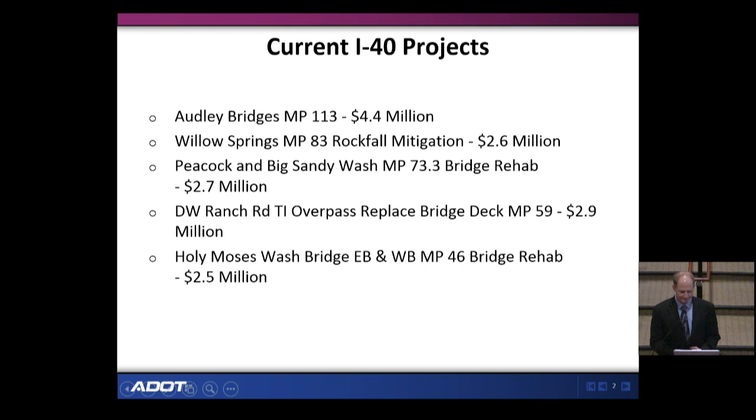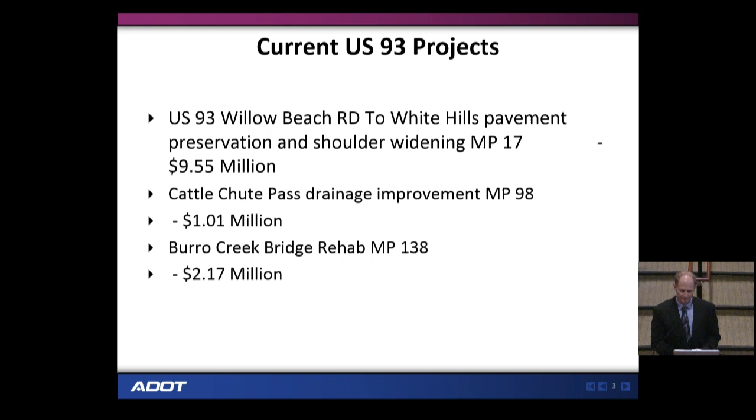Right now on I-40, we have several projects going on between Seligman and Kingman. Most of them are bridge projects. We do have one rockfall project within the Willow Springs area, and later this fall we will have a pavement preservation project going on in that same area. And then on 93, we are just finishing up a pavement preservation and shoulder widening project up north from milepost 17 to 28. South of I-40, we have a drainage project as well as another bridge rehab project just getting started.

One of our focus areas is on 95 in the Bullhead City area to look at improving safety. Part of it is looking at access management, and another part is trying to identify a parallel corridor to relieve some of the traffic volumes off of 95. We've been working on ideas for the past few months, and we will be presenting these concepts and proposed solutions to the public this fall. We will also be pursuing HSIP funding for certain areas.

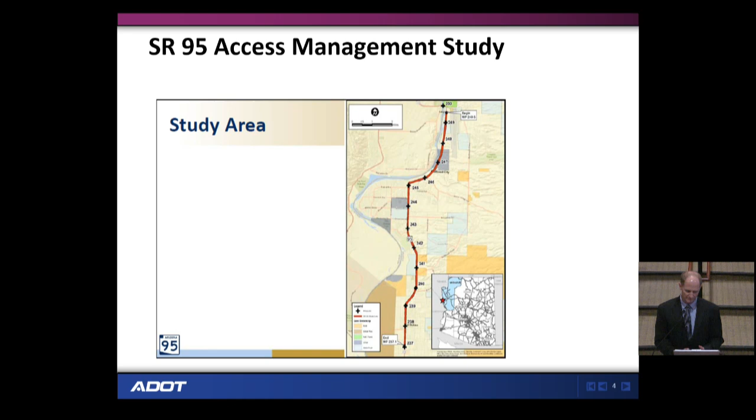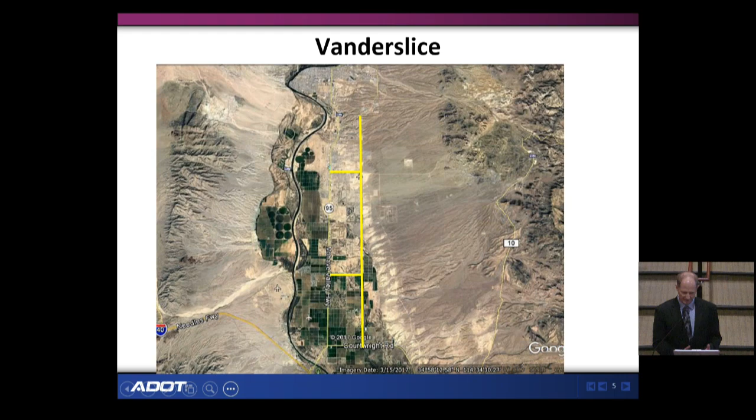About 10 years ago, Mohave County conducted a design concept report to look at a parallel corridor known as the Vanderslice study, or corridor. So what we're looking at now is another study to see how we can phase that in smaller, more affordable segments. The estimate was a little over 40 million, so knowing that funding is tight, we're looking at how we can break that up over time.

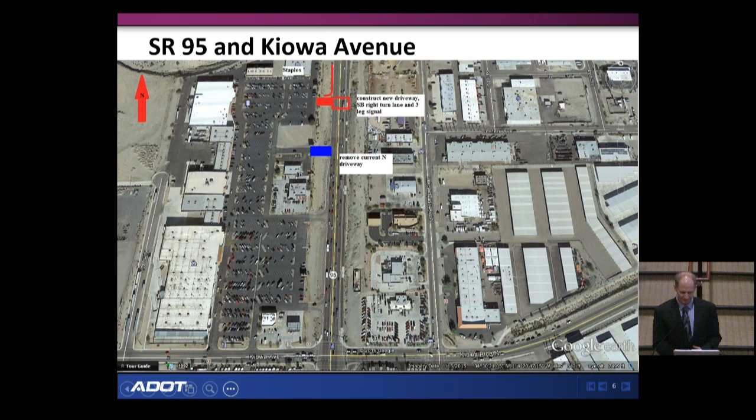Another safety project down in Lake Havasu will construct a center raised median from Kiowa Avenue past the strip mall area. This project is moving along and is scheduled for this fiscal year. We are adding a signal at the far end to help with the left turn volumes.

As for the West Kingman interchange, we are looking forward to that going forward. As we talked about last night, there are several times when traffic backs all the way up to the 68 interchange. Right now, in fiscal year 18, we have $5 million for design, and then in 2020 we have $10 million set aside for right-of-way, and in the development program we have $55 million for construction. This is just phase one, the Phoenix to Vegas segment. The Vegas to California segment would be at a future date.

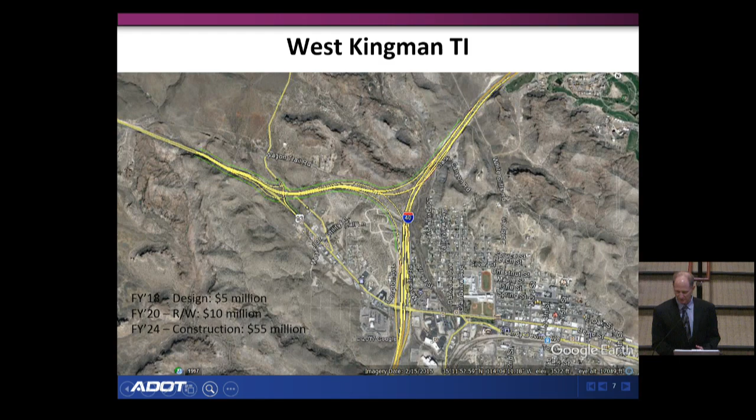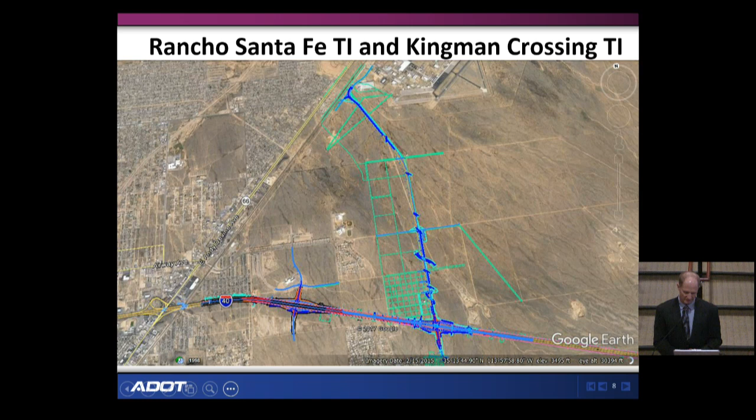Two other interchanges of interest are the Rancho Santa Fe TI and the Kingman Crossing TI. The one on the right is Rancho Santa Fe, which connects to the airport area. This will support industrial development in that area, as well as remove truck traffic from Andy Devine. To the left is the Kingman Crossing interchange, which will provide access to the hospital as well as property in that area suitable for commercial retail. We've recently been meeting with the city and stakeholders to discuss partnerships and possible funding strategies. That's something we'll continue to do and see what we can work out. So with that, that's all I have—if you have any questions.

Alvin, I was wondering if you could clarify for me. I was of the understanding that where the Kingman Crossing TI is at, maybe the city had also put some drainage in or something. That wasn't addressed yesterday, so I was just wondering if you could elaborate on that.

I'm sorry, the drainage? Was there some type of infrastructure that the city of Kingman had done some time back? Oh yeah, there was one easement we were talking about. Maybe some of that easement could go back to the city. Thank you, so that would be another discussion.

Does anyone have anything additional? Thank you, all right, thank you.

Now we'll move on to the director's report. Good morning, Madam Chair, members of the board. The director sends his regrets, he had a conflict today and could not be here. He had no final issues to report. If there are issues you want the director to address at a future meeting, please let me know and we'll make sure to get him on the agenda and prepared to present. Thank you.

Madam Chair, that's fine, I'll go ahead and go through. The first item I had on the list was aviation. We are proceeding now with dispersing funds for the federal, state, local program. The 2 projects currently being approved through the PPAC are part of that grant program. Those are not projects that have been delayed, those are projects that are coming through. The federal grants were granted, and we're providing the match for those projects.

Madam Chair, Board Member Stratton: I believe when it was recommended to postpone the 20-plus projects, one of the questions I had at that time was whether the people on that list we had postponed would have any preferential treatment or come back on the list when we had the funds. That was going to be discussed with finance and the aviation department, and I don't believe we ever truly sorted that out. I'm wondering if those people we delayed can now start applying again, or where are we at?

Board Member Stratton, Chairman: what we currently have is 3 grant programs. What's being funded currently is the federal, state, local program. The state local program and the airport pavement management program are not being funded, but they'll be coming back online in 2019 and 2020 respectively. At that point, any projects that have been delayed will come through. We are in fact requesting all of our airport entities to go ahead and apply for grants so that we can track those and have a list put together, so we can make sure projects are hitting as quickly as possible once we get funding, and so that if projects have gone from minor to major because funding wasn't there, we know that's happening and can assist with that funding.

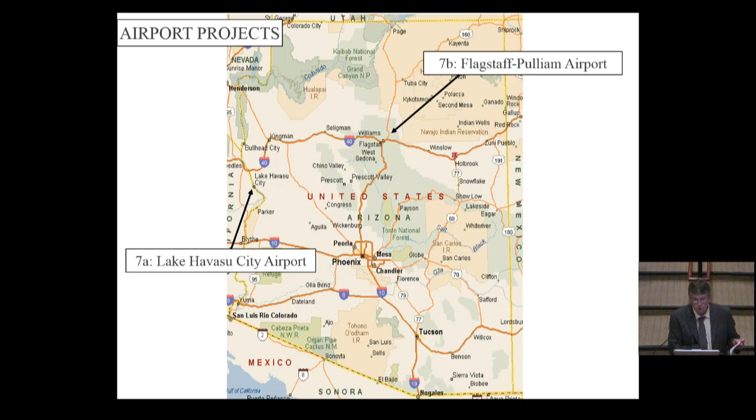Do we have a motion to accept and approve the airport projects, items 7A and 7B as presented? Second. Motion by Board Member Sellers, seconded by Board Member Cuthbertson. If there's no additional discussion, all those in favor? Aye. Aye. All those opposed? Motion carries. Thank you. Thank you.

We'll now move on to item 8, which is the project modifications to the FY 2018-2022 5-Year Transportation Facilities Construction Program. Dallas Hammit, please.

Morning, Madam Chair. I was asked to prepare an update on 2 projects that had discussion last month in Payson. The first one is on State Route 69.

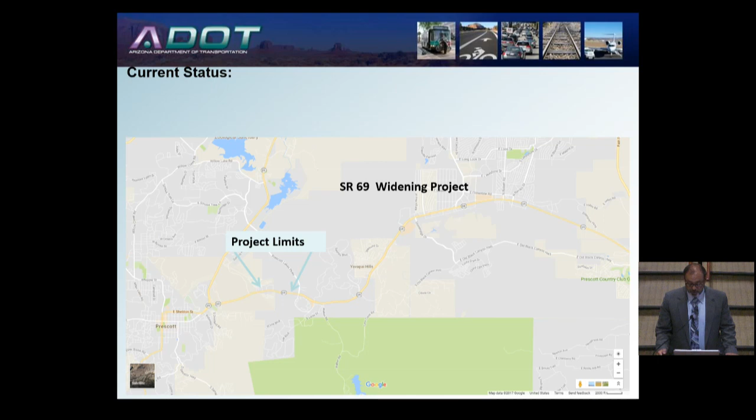This is in the city of Prescott. You can see the limits of the project on the screen, and I'm going to zoom in a little bit and show you. If you know the area, there's a Walmart as you're approaching from Prescott Valley into Prescott, and the car dealer, and then you go down a hill, past Lowe's, and into the Frontier Village.

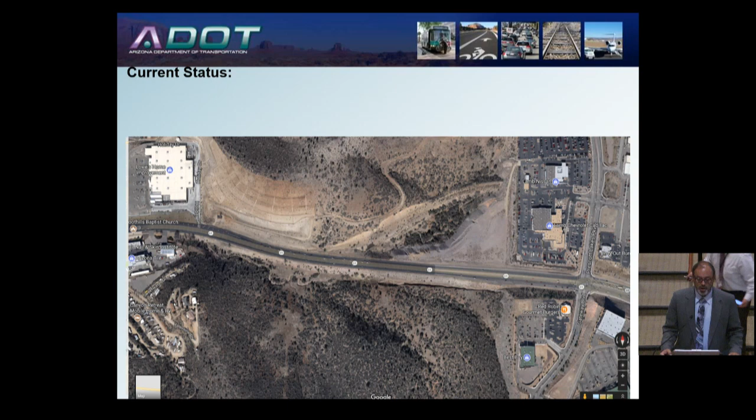That area, we go from 3 lanes to 2 lanes back to 3 and sometimes more. It's a bottleneck. The locals have identified this as a concern and have come, not just identified it, come with money and said, hey, we'd like to work with the department to improve this.

So where are we at to date? A scoping document was completed a couple of years ago. As the project developed over time, there will be some modifications to that scoping document, but they're fairly minor. The major elements of the scoping document will remain.

As of last week, July 12th, we did complete a joint project agreement, a JPA that all areas signed, and it has multiple signatures with the MPO, the county, the county flood control, and the city of Prescott have all signed on to that agreement. It was executed July 12th.

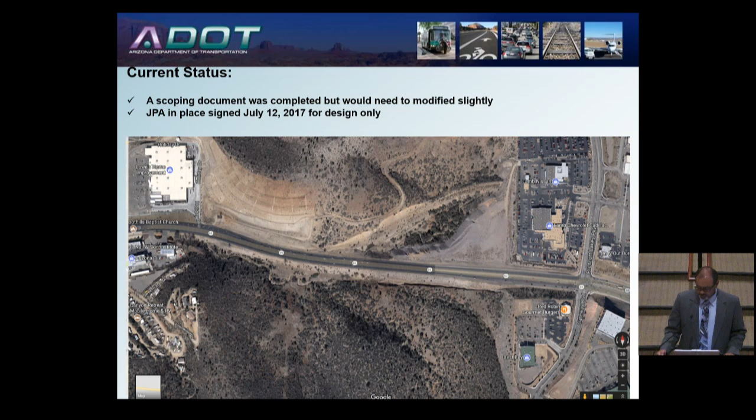With that, we have the opportunity to bring on a designer. We will go through ADOT's on-call, bring that in, and we should be able to have a designer on board by late October. By the time we're in our next programming cycle, we will be at a point where we can give a good cost estimate, exactly what this project will cost, and then we need to program.

Right now, we have a rough estimate from the scoping, but with those modifications, we're between 2 different folks that briefed me, a couple million dollars different. So once we get going in design, we'll get to a 30% design and have good numbers that we could actually program very well.

Before I go to the Flagstaff project, any questions on the 69 project? Madam Chair, Board Member Stratton.

You say you're a couple million dollars apart. What's the maximum it's looking like? $10 million. And the locals are bringing how much?

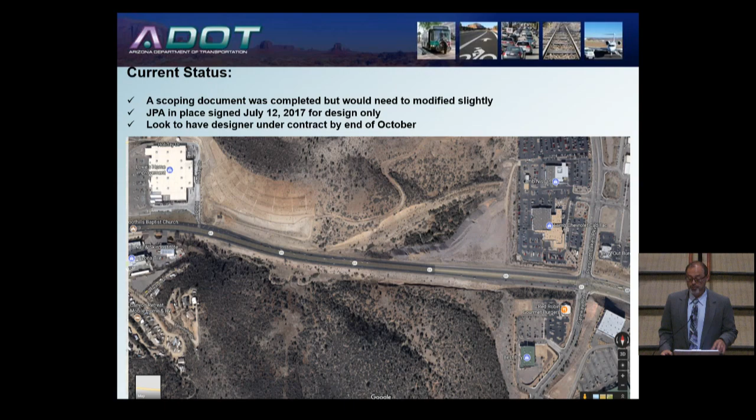Right now, the only thing that the locals have brought in, they brought the full amount for the design. They're looking at future years. My understanding, about $1.2 million over 2 years, Chris knows theirs better than I do. But we do not have an agreement started on the construction yet, only on the development and design.

We currently have $650,000 programmed in fiscal year '20, and then we also have flexibility in fiscal years '21 on that we can still move things around. If we needed additional funds, we could bring that back to our board and add another $650,000, so potentially another 1.3. So that would be a little over $2 million you guys would bring at that point? All right, $1 million for the design and potentially 1.3 for construction.

And did your $10 million, Dallas, include design, or was that construction only? I believe that was a complete project total, so it would be design and construction. Again, with the change in the scoping, there's not a detailed estimate, so a lot of it is gut feel from experts, but we haven't fully scoped the project that it will be designed, so we don't have exact numbers at this time.

So going through this detail, obviously it's something that I'm assuming the state engineer's office agrees needs to be done, since you're doing the scoping and looking into the project in detail. This is a need that we can support. At the same time, there's lots of needs, and within the system, if we brought it into this program or any other, we're going to bump out another project that we felt had a need as well. So we haven't prioritized it above some of the others.

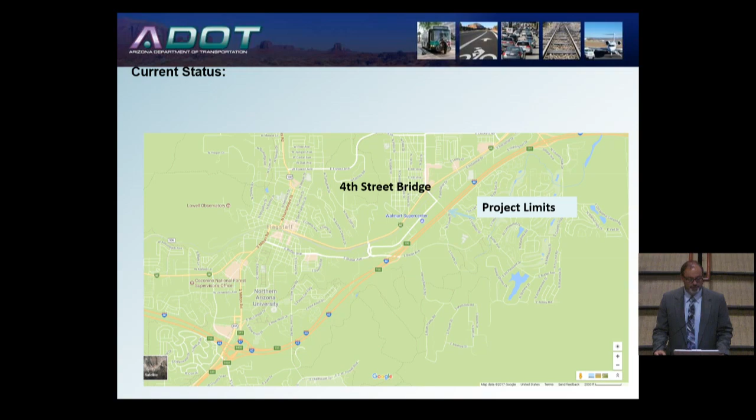The 4th Street Bridge is a bridge over Interstate 40 in Flagstaff. You can see the big map, and then I'm going to zoom in on it. There's actually 2 bridges over Interstate 40. ADOT was in the process of doing a preservation project on those bridges. The city of Flagstaff approached the department and said, while you're doing this work, it would make sense to widen these bridges to add future capacity on 4th Street. As you can see from the aerial, to the north there is a widening of the existing roadway.

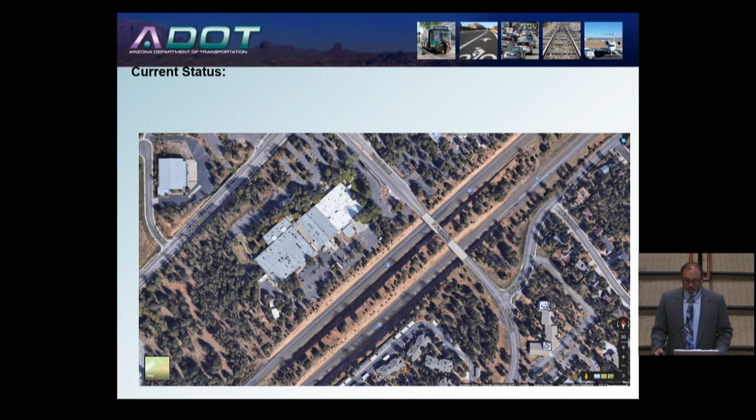ADOT had a scoping document completed. They are reconsidering that scoping because the original document was just to preserve the existing bridges. What do we need to do if we want to expand? One option is to rehab the existing structure and widen it. The other is to reconstruct the whole thing. One advantage of reconstructing is we can account for future widening of I-40. Someday we're going to need, Audra would tell me it's today, but someday we're going to need 3 lanes in each direction on I-40, and if we're putting money into a bridge structure, it makes sense that the new structure can span 3 lanes.

So we're in that process. At the same time, Audra and the district staff are working with the city of Flagstaff, getting agreements on cost. Right now, a rough estimate is around $9 million, with ADOT looking at $4 million and the city $5 million. They have draft ideas for a JPA that have not been executed, but they are moving forward. Once that happens, we'll finish the scoping to know whether it's going to be a new set of bridges or we can work with preservation. That decision should be made within the next month, what type of structures we're going to do. So that project is moving forward through the JPA negotiations, and the scoping will be completed early next year.

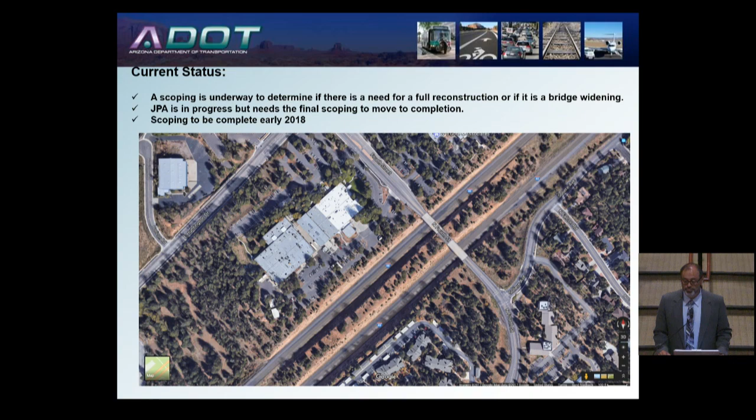Board Member Stratton asks: Dallas, didn't we have $2 million budgeted for repairs? That was in the preservation plan, which would be part of our $4 million if we bring that forward. What year was that for? I believe it was 2020.

I'd ask that this come back to the board at the same time as the simple project comes back, since things will be further along, the JPA may be signed, and the scoping or recommendation on replacement would be done. It's actually the same situation, an entity is coming forward with a lot of money and it would cost ADOT very little in addition. We'd like to discuss it then. No motion is needed, but we'd like both items brought back for the November meeting, and they'll be on the agenda.

If there's nothing further on item 8? Not on item 8, Madam Chair. Board Member Sellers asked whether this would delay the project in any way by delaying the decision until November. Madam Chair, it would not.

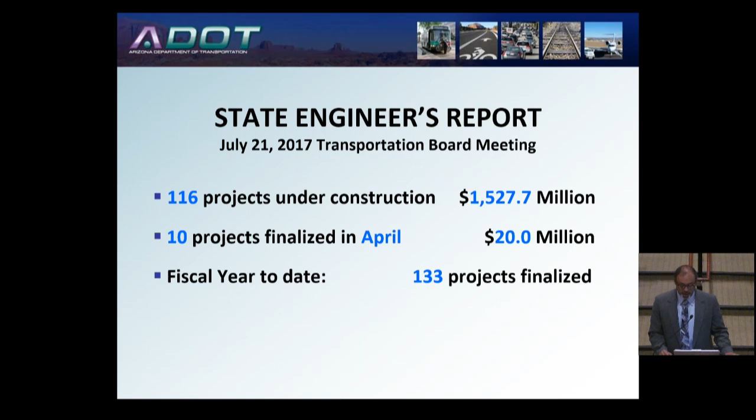If there's no additional questions, we'll move on to item 9, the state engineer's report. As far as the state engineer's report, currently we have 116 projects under construction, totaling $1.527 billion. 10 projects were finalized in April, totaling $20 million, and year to date we have finalized 133 projects.

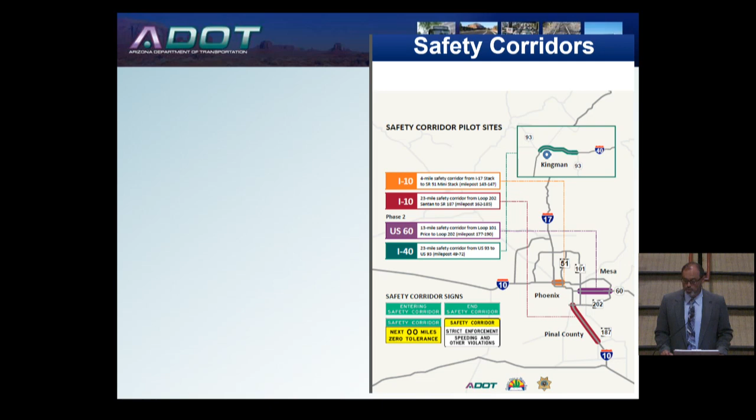I was also asked to brief the board on our safety corridors. Right now we have 4 safety corridors throughout the state. Some may ask how we picked these 4, and why only 4. We work closely with DPS, the Department of Public Safety, and the Governor's Office of Highway Safety to identify corridors with a large number of crashes and citations. DPS brought that information in, and the big thing is behavior, we believe behavior is causing a number of the crashes on these corridors.

The corridors include I-40 between the 93s, here in Kingman, as you go north on 93, then take I-40 and go south to Wickenburg, that segment of I-40 is one of our safety corridors. The segment of I-10 as you approach the tunnel is a safety corridor. The segment of I-10 as you leave the 202 in Chandler and go through the Gila River is another safety corridor, and our last safety corridor is also in the metro area on US 60.

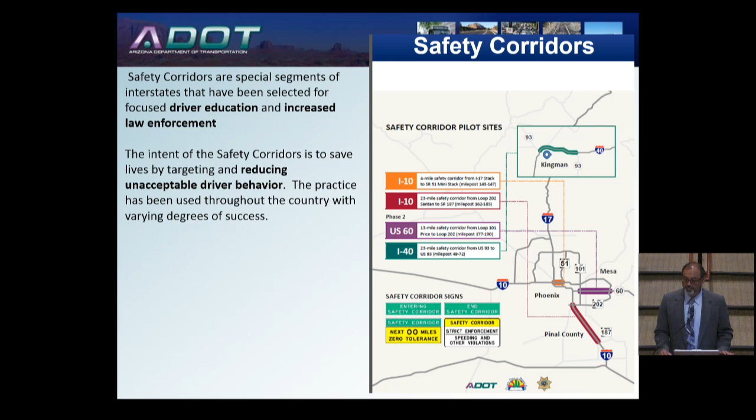In these areas, DPS is committed to extra law enforcement. That's one reason we can't expand to more areas, since it expends multiple resources. We participated by getting some signs, and the Governor's Office of Highway Safety brought money to the table for this effort. We're working to educate drivers and increase enforcement. Our key goal is to save lives by reducing unacceptable behavior. They'll be ticketing very close to the speed limit, the signs say zero tolerance, and I've had reports on I-10 that people have been cited for less than 5 over at different times.

We targeted areas where we had a large number of fatal crashes and citations based on behavior: speeding, lack of restraint, and impairment. That's how we identified our safety corridors. We're evaluating them over the next 2 years, we're about 9 months in. After that period we plan to continue the program but may switch corridors, depending on whether we made a difference, and if so, we may find additional funds to put more law enforcement on another corridor.

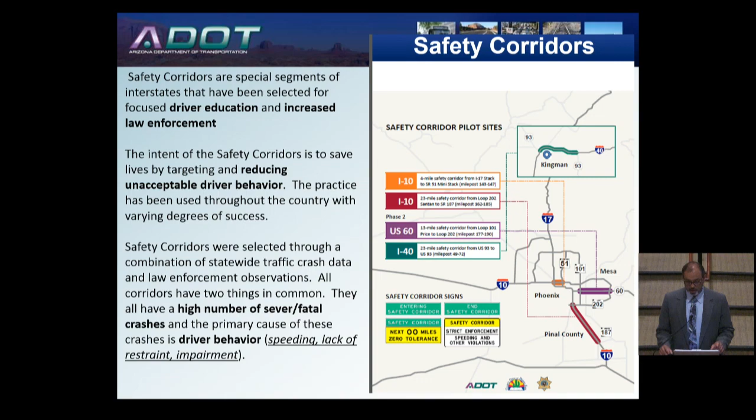I would like to ask a question about those safety corridors, two points regarding law enforcement. For those particular areas, have they identified what's causing the higher level of problems, is it speeding, alcohol-related, drug-related, texting on a phone? And second, do those stretches have the overhead signage that's going up around the state?

Madam Chair, the answer to the first part is yes to all of them. These are identified because of behavior issues, driving too fast is the common thread throughout all 4 corridors, there's excessive speed.

But there is also impairment. They have details, they're putting details to do stops to see if there's impaired drivers. They're adding that to this. They identify distracted driving. Right now we don't have a primary law that we can stop for distraction, other than if you're being careless. We don't have a stop for 'I was texting' or 'I'm distracted.' But if you're making erratic lane changes, they can stop you for that. They're looking for those behavior areas.

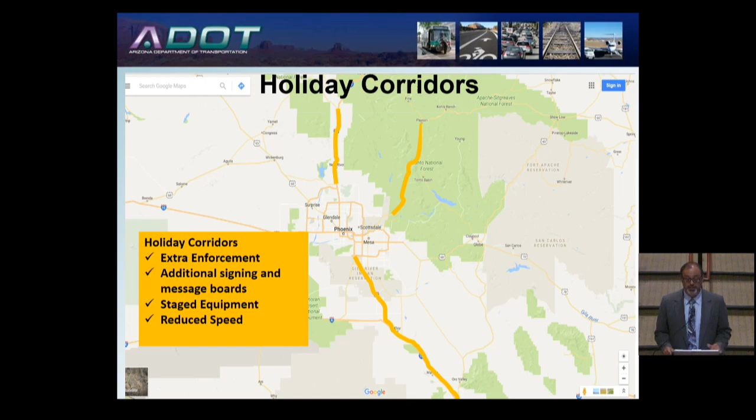I think I had heard a comment with regard to it actually flashing 'holiday corridor,' and somebody said, well, the holiday's over. Well, it was like the day after, and I don't think things had gotten changed yet, but there was still a lot of traffic coming home. It was just one of those comments that somebody had made about it.

If there's nothing additional with regard to the state engineer report, we'll move on now to the construction contracts.

Madam Chair, thank you, and all the board, thank you for the approval of the items in the consent agenda. We do have some projects to talk about. I want to point out in the summary sheet, the year-to-date total: we have $445 million, almost $800,000 in low bids. Our estimate was $441 million, so we were within 1.1%. Starting next month, we will start the fiscal year over.

I asked, because when I saw this yesterday or the day before, why is it that now we're in July in the next fiscal year these were the projects advertised in the past year. But starting next year, we'll start this table over for the new fiscal year. As for the year, we are within 1.1% total, and a lot of that change came in the last few months. We've seen more pricing volatility over the last few months.

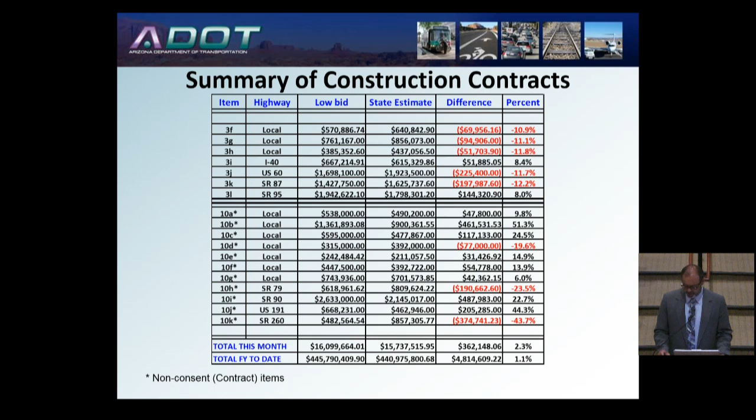Item 10A, if we're ready, Madam Chair. Yes, this is a project in Flagstaff—it is a widening of a local street. One of the things, I get information very fluid, so 5 minutes after the board meeting started, this project was originally listed asking the board to postpone. I'm going to have a different recommendation. Michelle said I will not go to jail if I recommend this, so I am going to move forward with it.

On this project, the low bid was $538,000. The state's estimate was $490,200. It was over the state's estimate by $47,800, or 9.8%. One of the concerns we were looking at on the postponement, since it is a local project, was whether they had the money for the extra funds. I did find out this morning they do.

So my recommendation is not to postpone, but after reviewing the bids, the department believes this was a responsive and responsible bid and would recommend award to Fan Contracting, Inc. One note: if I'd had the information earlier, this would have been on the consent agenda, because it's within those limits.

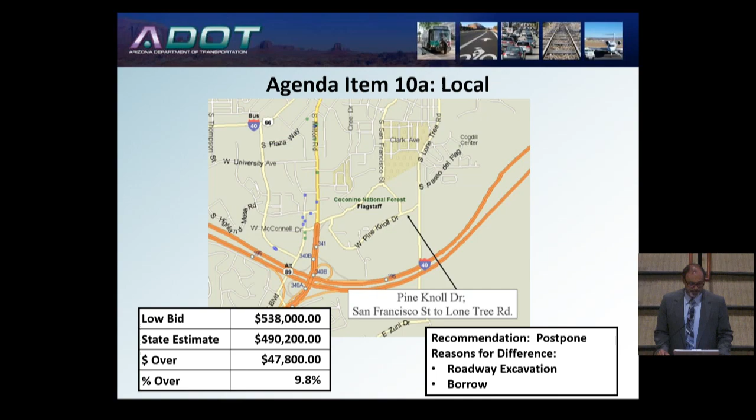Okay, could I just have clarification? You said Fan Construction, and this is... Oh, excuse me, it's Fan Contracting, Inc. Yes. Okay.

Motion by Board Member LaRue, second by Board Member Cuthbertson to approve item 10A. All those in favor? Aye. All those opposed? Motion carries.

Okay, now we'll move on to item 10B. Madam Chair, this is a project in La Paz County. It is a shoulder repair.

The low bid was $1,361,893.08. The state's estimate was $900,361.55. It was over the state's estimate by $461,531.53, or 51%. We saw higher than expected costs for our concrete ford walls and mobilization.

The county, since they're on the hook for coming up with additional funds, has asked us to reject all bids. They'd like to take that, rescope it within the budget, and re-advertise at a later date. So the recommendation is to reject all bids.

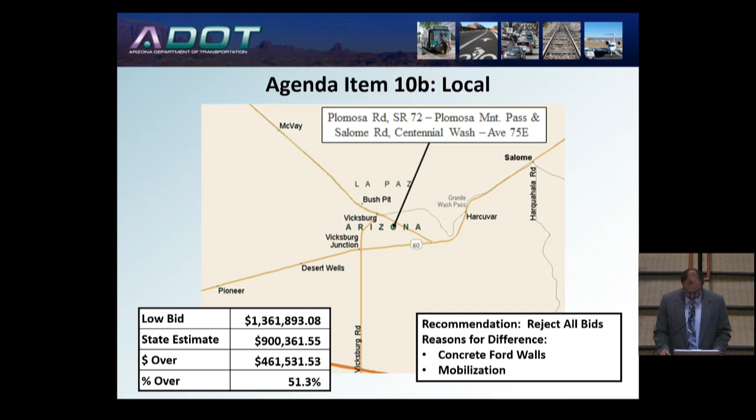Is there a motion to accept and approve? Board Member Hammond made a motion to accept and approve staff's recommendation to reject all bids. Is there a second? Seconded by Board Member Stratton. All those in favor? Aye. All those opposed? Motion carries.

Item 10C. Thank you, Madam Chair. This is a project in the city of Glendale. It has some decorative pavement and lighting. The low bid was $595,000.

The state's estimate was $477,867. It was over the state's estimate by $117,133, or 24.5%. The local has come up with the additional funds. The reason for the difference was some of the special pavers that were used in the grading for the pavement. It was a tight area. With the additional funds, staff has reviewed the bids and believes the bid is responsive and responsible.

And would recommend award to KAZ Construction, Inc. Move to award. Second. Motion to accept and approve staff recommendation to award the contract for item 10C to KAZ Construction was made by Board Member LaRue.

Seconded by Board Member Stratton. I'd like to ask a question. This is in the middle of the city, and you only got 2 to bid on it? Is that normal? Not generally. I think with the lighting and the site work, it's a mix on who's going to be a prime, an electrical contractor or a paving contractor. I think as we put together projects or encourage locals, we need to look at that, because there are few who can do both those items of work.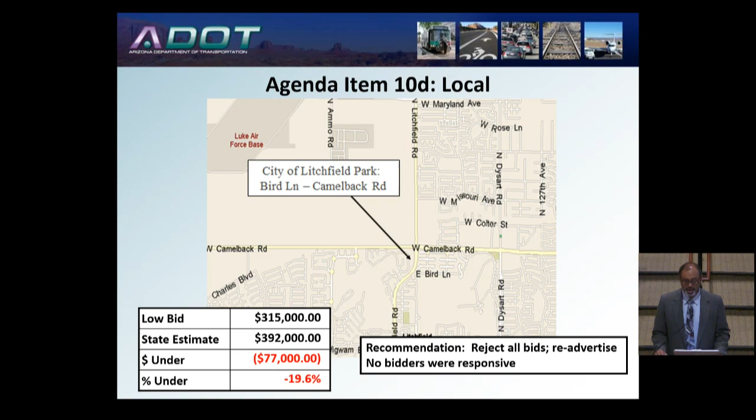Madam Chair, Board Member Stratton. Is this the project we received the letter on from Combs? Madam Chair, Member Stratton, that is correct. I have a couple of questions, if I may. Just curiosity.

Is it that all bidders have to put their DBE in with the bid, or within 5 days? Or if the apparent low bidder did not submit or didn't meet it, would the next bidder have 5 days after notification to turn that in? Or does he or she have to turn it in at the time of the bid?

Madam Chair, Member Stratton, all bidders have to turn in their DBE within 5 days of the opening. This did change right at the first of the year, and if you remember, I think we were in the Tucson area, we had a similar issue. I briefed the board at that time.

At the same time, the department did a lot of outreach with our Associated General Contractors. They worked with us very closely on developing this bid. Our federal partners also worked with us. One of the recommendations was, one, to turn in all your stuff at bid time. There is some disadvantage for the contracting community with that.

The other was that the top 3 have to turn it in every time. The AGC, the contractors, had some concern with that. One, you're asking a disadvantaged business enterprise to give me paperwork and do this work, and you're not going to get the job because I was second or third. And they didn't think there was going to be compliance.

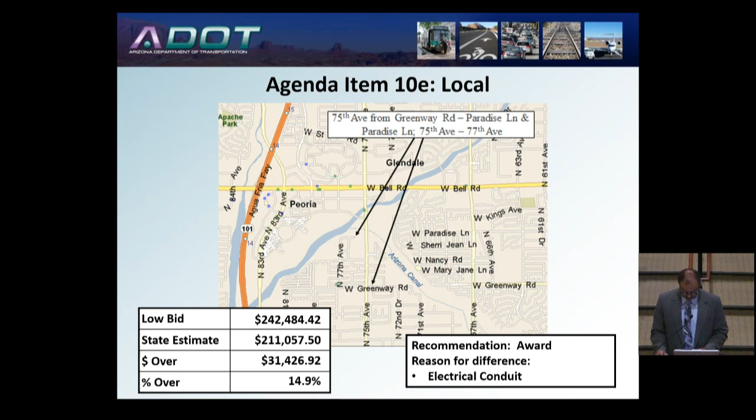We have reviewed the bids, and the department believes it was a reasonable and responsive bid and would recommend award to Contractors West, Inc. Move to award. Motion by Board Member LaRue to accept and approve staff's recommendation to award the contract for item 10E to Contractors West, Inc. Is there a second? Second, by Board Member Cuthbertson. All those in favor? Aye. All those opposed? Motion carries.

Item 10F. This project is another local project in the city of Nogales. The low bid was $447,500. The state's estimate was $392,722, or it was $54,778 over the state's estimate, or 13.9%.

Right now, the department is working with the city of Nogales. They are looking for the additional funds. They believe they will be able to come up with that funding, but at this time, we're recommending postponement so they can get their finances in order.

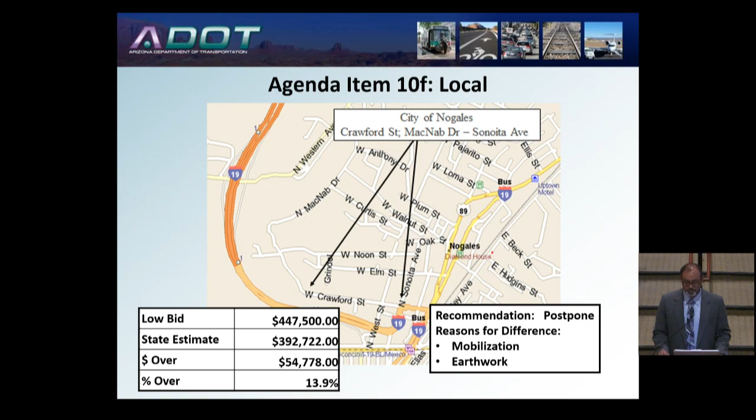Board Member Stratton: I actually had a call from someone in Nogales that I happen to know, the deputy director. He said they had found the funds, to his knowledge. He has some concerns that postponing this too long, there may be some difficult weather issues because they just had a sewer water line project on that particular street. So I understand we have to have it in writing from them, but I would ask that if you receive that, if we could call a telephonic meeting and get this passed so they could move forward to accommodate their concerns about weather.

Madam Chair, Member Stratton, if that's the board's prerogative, we'd be happy to do that as soon as we get the information. Well, Madam Chair, don't forget, next Friday we've got a telephonic meeting for the wrong-way driver item, so if this comes in early next week and it's good to go, that can be included in that agenda. So we'll keep monitoring that as staff. Okay, thank you.

So do we have a motion to accept and approve the staff's recommendation to postpone item 10F? Motion was by Board Member Hammond, seconded by Board Member Cuthbertson, to postpone item 10F as stated. All those in favor? Aye. All those opposed? Motion carries.

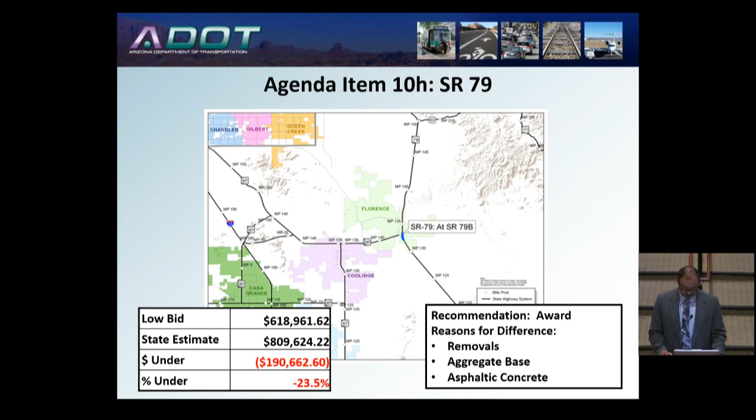So moved. Motion by Board Member Stratton to accept and approve staff's recommendation to award the contract for item 10H to Combs Construction Company, Inc. Is there a second? Second, it's been seconded by Board Member LaRue. If there's no further discussion, all those in favor? Aye. All those opposed? Motion carries. Item 10I.

Thank you, Madam Chair. This project is within the city of Sierra Vista on SR 90. It's a roadway rehab and widening. The low bid was $2,633,000. The state's estimate was $2,145,017. It was over the state's estimate by $487,983, or 22.7%. We saw higher than expected pricing within the asphaltic concrete, the aggregate base, and a retaining wall, where we saw a higher than expected price. After review of the bids, the department believes it was a reasonable and responsive bid and would recommend award.

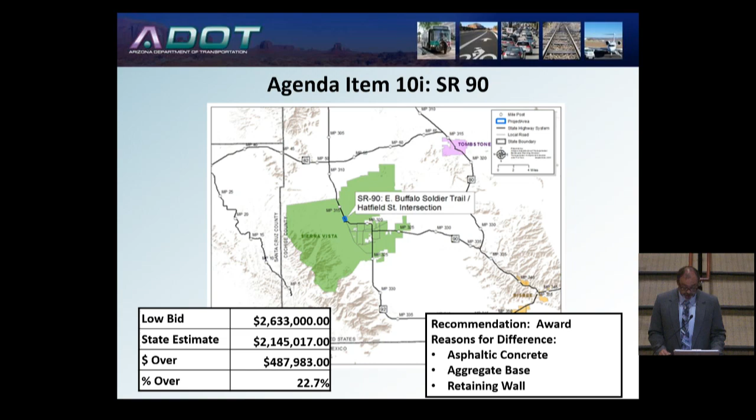to KE&G Construction, Inc. Do we have a motion to accept and approve the staff's recommendation? So moved, motion by Board Member Cuthbertson. Is there a second? Second, seconded by Board Member Hammond. Motion to accept and approve staff's recommendation to award the contract for item 10I to KE&G Construction, Inc. If there's no further discussion, all those in favor? Aye. All those opposed? Motion carries. Item 10J.

Thank you, Madam Chair. So we're going home for Mr. Cuthbertson here. This is in Clifton. We met with the community about a year and a half ago, and we talked about some traffic calming opportunities through the area. On this project, the low bid was $668,231. The state's estimate was $462,946. It was over the state's estimate by $205,285, or 44.3%. We saw higher than expected pricing in the concrete items and mobilization. The crews will have to mobilize quite some distance. We did review the bids. Staff believes it was a reasonable and responsive bid and would recommend award to AJP Electric, Inc.

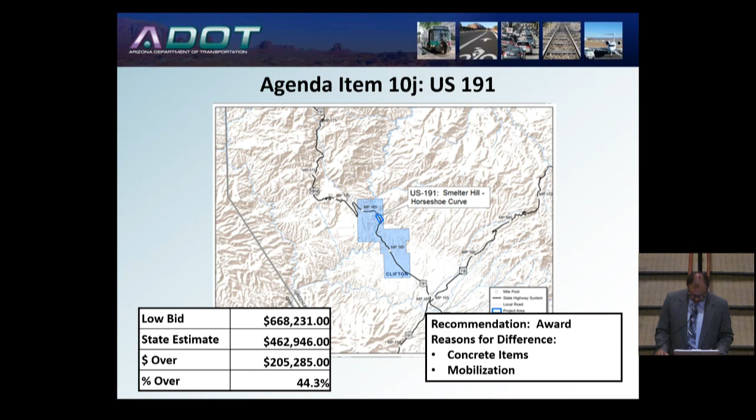Is there a motion to accept and approve staff's recommendation? Move to approve. Motion by Board Member Cuthbertson to accept and approve staff's recommendation to award the contract for item 10J to AJP Electric, Inc. Is there a second? Second, seconded by Board Member Stratton. With no further discussion, all those in favor? Aye. All those opposed? Motion carries. Item 10K.

Thank you, Madam Chair. And this is my last one. I'm sure right now Mr. Hammond is kicking himself because he told me last night, we do not hear enough from you at the board meeting. So right now, I'm sure he's kicking himself.

Made up for it. On this project, it is a removal of a water supply. When we did some work on the 260 corridor, a number of projects, we put in a water system supply to provide construction water for this project. For the last project, we have a different source, so we need to remove this as part of our contract and agreement with the Forest Service.

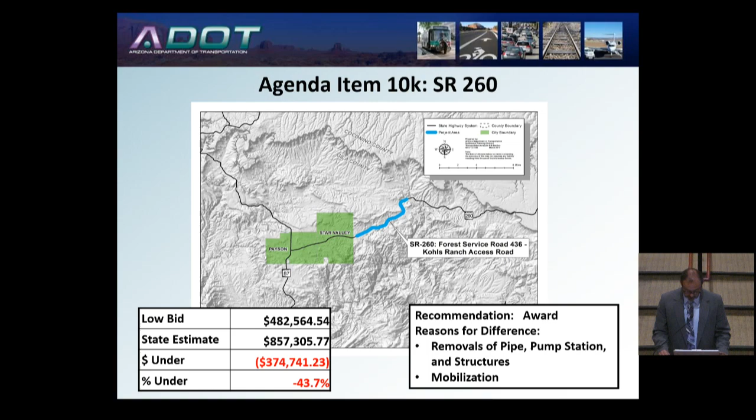The low bid was $482,564.54. The state's estimate was $857,305.77. It did come under the estimate by $374,741.23, or 43.7%. We saw better than expected pricing for the removal of the pipe, the pump station, and some of the structures. The contractor does receive these materials and sees a salvage value they can put into it, and we saw that in the good pricing they gave us. After review of the bids, the department believes the bid is reasonable and responsive and would recommend award to Hatch Construction and Paving, Inc.

Madam Chair, if I may. Board Member Stratton, a couple of questions, Dallas. Will this affect the Lion Springs project in any way?

Madam Chair, Member Stratton, no. We have found another water source that we do not need this one to do work for there. And will this complete our agreement between SRP, Forest Service, and ADOT? That is correct. And the injection wells, is that going to be completed by another contractor, or do we have to do anything there? Madam Chair, Member Stratton, I believe we have got the water table up to where we need it to be, and so we have met our requirements with SRP.

So will we have to do any further removal of any equipment other than what this contract covers? My understanding, and I'll confirm it, is that this completes all of our obligations when we put the water system in. Move to approve.

Motion by Board Member Stratton to accept and approve the staff's recommendation to award the contract for item 10K to Hatch Construction and Paving, Inc. Is there a second? Seconded by Board Member Cuthbertson. If no further discussion, all those in favor? Aye. All those opposed? Motion carries. Thank you, Madam Chair.